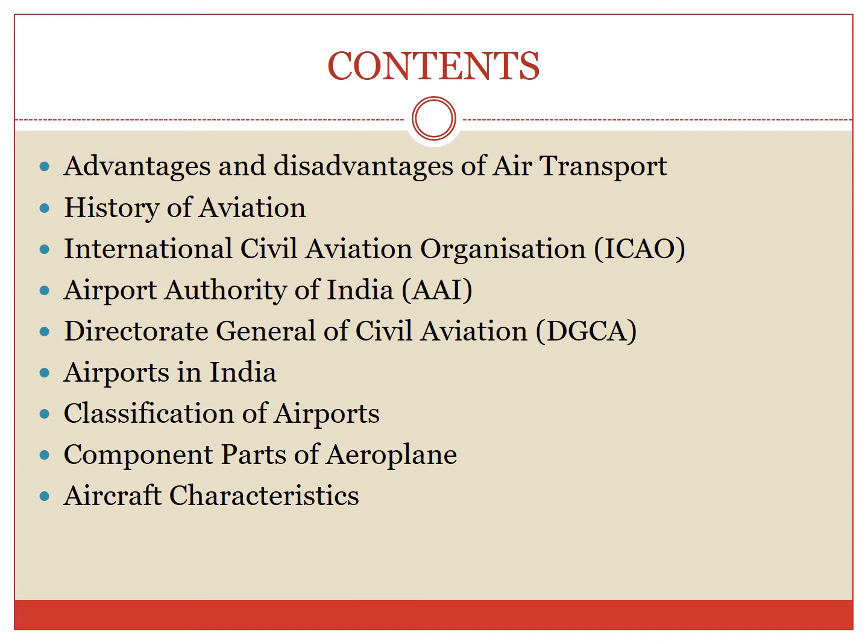Now moving to the advantages and disadvantages of air transportation, let us look into some advantages. As we all know, due to its high speed, it saves energy and time. Air transportation is continuous over land and water without loss of time, unlike road and rail networks. It helps in the economic growth of the country, faster development and distribution of products and services. Air transportation has the unique ability to open up any region that is inaccessible by other means of transportation.

It provides opportunities for foreign tourists for adventure during vacation, boosts tourism, and brings social changes by uniting people closer. It helps in better understanding of inter-regional problems. It helps in providing relief operations in emergencies like tsunamis, earthquakes, floods, etc. Airports generate several jobs and increase the value of land around them.

Now, major disadvantages are: it is very high in expense, including the cost of vehicles and traffic control systems. This mode of transportation has very few passengers and small cargo capacity. Thus, the freight charges are comparatively very high. The weight carrying capacity of an aircraft is lowest amongst the other carriers of transportation.

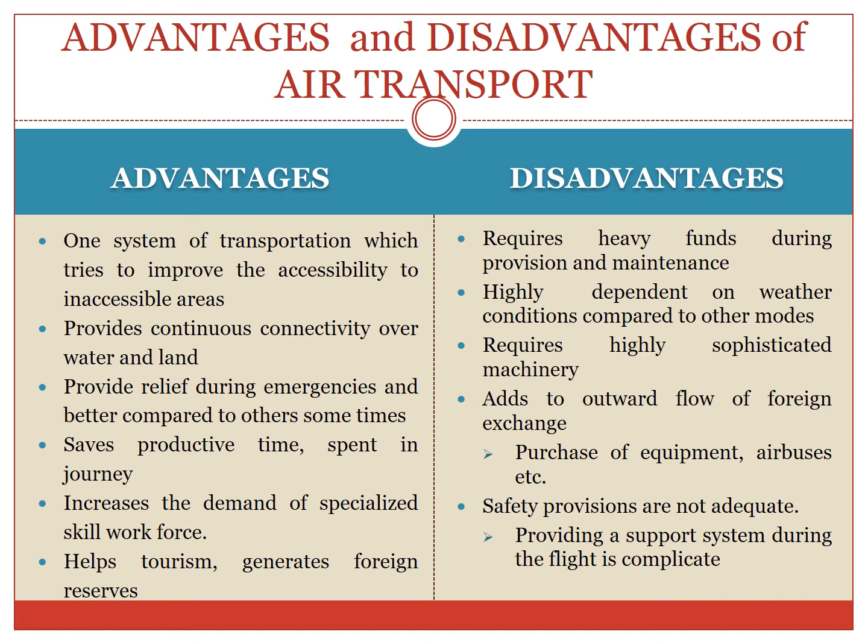Roger Bacon was the first man who studied the flight of birds and made a prophecy in 1266 that the source of energy for flight can be derived from fire. In 1903, the first flight was made by a bicycle repairman named Orville Wright in a power-driven aircraft which was heavier than air. He propelled himself through the air a distance of 35 meters in the USA.

During the period 1914 till 1918, technical development of aircraft and engines in terms of dependability and load carrying capacity accelerated, partly due to World War I. In 1918, the first international air services started between New York and Washington. In 1929, it was in India that regular air flight was started between Karachi and Delhi by Imperial Airways.

In May 1927, the first longest flight of over 4,500 kilometers was undertaken from New York to Paris. In 1939, the first jet flight was flown in air. And in 1952, as we reached the 1950s, full-scale commercial service started using the Boeing 707.

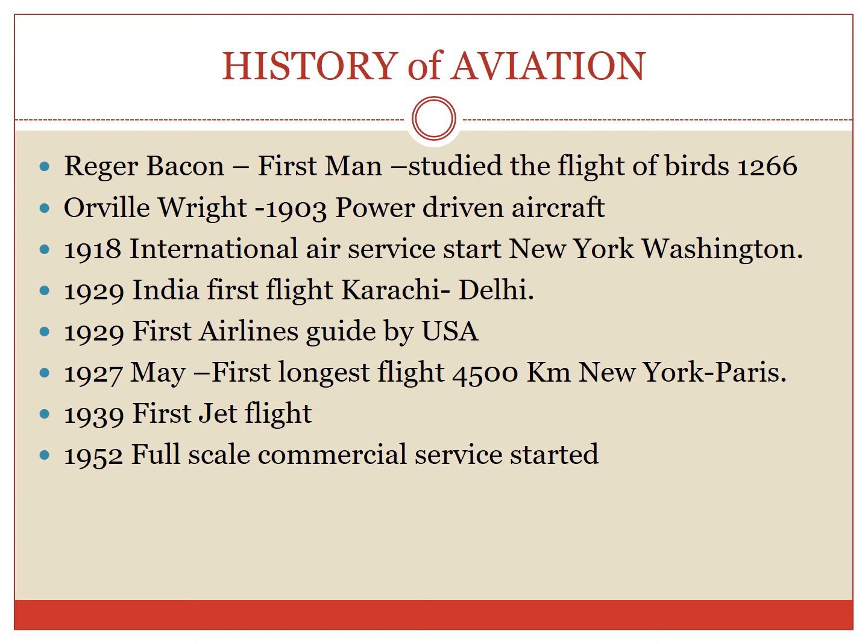Now we come across to the International Civil Aviation Organization. In 1944, delegates from 52 nations met in Chicago, USA to consider the problems of international civil aviation. It was then created on April 4th, 1947, with its headquarters in Montreal, Canada. It is a specialized agency of the UNO, United Nations Organization.

ICAO had some aims and objectives. Some of them are: to ensure safe and orderly growth of international civil aviation throughout the world; to encourage the art of aircraft design and operation for peaceful purposes; to promote the development of airways, airports, and air navigation facilities for international civil aviation; to meet the needs of the people of the world for safe, efficient, and economical air transport; to prevent economic waste caused by unreasonable competition; to avoid discrimination between contracting nations; to promote safety of flight in international air navigation; and to promote generally the development of all aspects of international civil aviation.

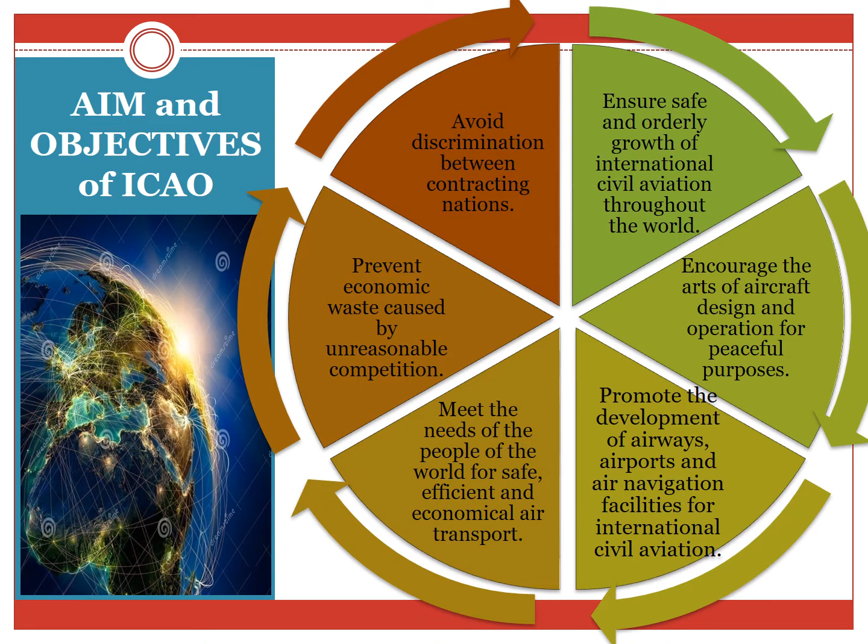Now moving across to the Airport Authority of India. The Airport Authority of India was constituted by an Act of Parliament and came into being on 1st April 1995 by merging the National Airport Authority (NAA) and the International Airport Authority of India (IAAI), forming AAI, the Airport Authority of India. The merger brought into existence a single organization entrusted with the responsibility of creating, upgrading, and managing civil aviation infrastructure, both on the ground and in airspace in the country.

Some of the major functions of AAI are: design, development, operation, and maintenance of international and domestic airports and civil enclaves. It controls and manages Indian airspace extending beyond the territorial limits of the country as accepted by ICAO. It also handles construction, modification and management of passenger terminals, and the development and management of cargo terminals at international and domestic airports.

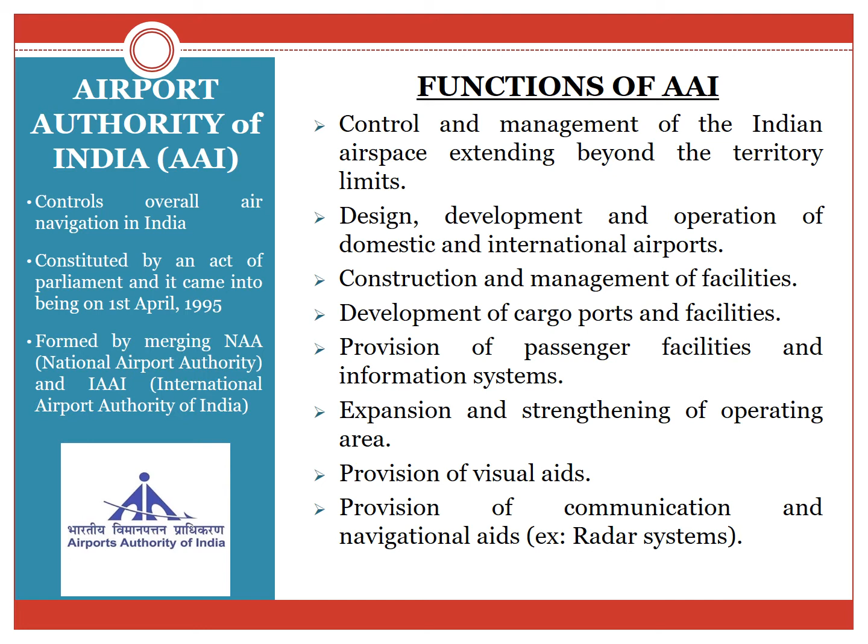It helps in expansion and strengthening of operational areas such as runways, aprons, taxiways, and many other things. The provision of visual aids has also been looked after by the AAI.

Now moving to DGCA, the Directorate General of Civil Aviation. It is a regulatory body in the field of civil aviation, established in 1945. Its functions include regulation of air traffic services, licensing of pilots, registration of aircrafts, licensing of aerodromes, approval of tariffs/schedules, monitoring flight crew standards, and supervision and training of pilots.

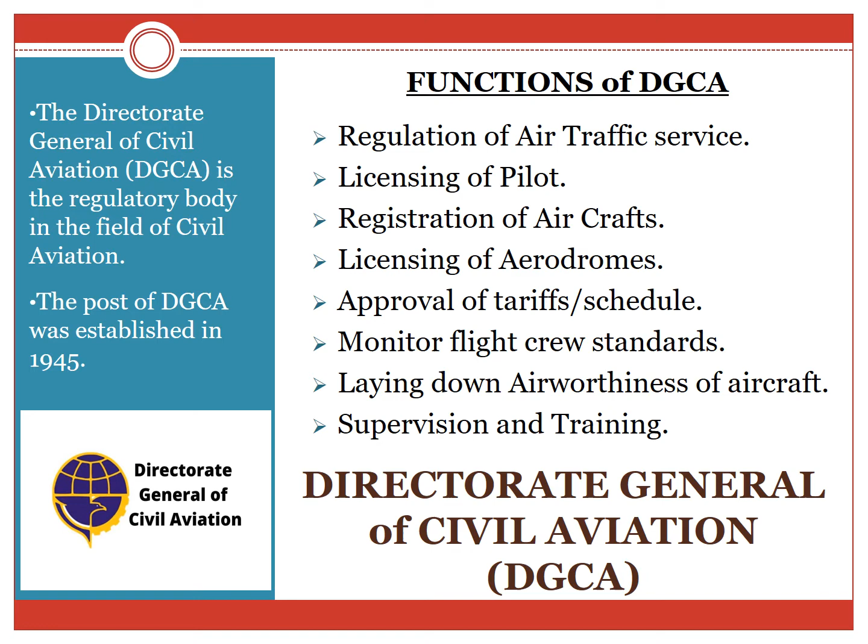There are 131 total operational airports, that is 106 with scheduled commercial flights, including some with dual civilian and army use.

Before moving to the classification of airports, there are two terms which have different meanings but are often misunderstood: aerodrome and airport. What is an aerodrome? A defined area on land or water intended to be used either wholly or in part for the arrival, departure, and surface movement of an aircraft. This is known as an aerodrome.

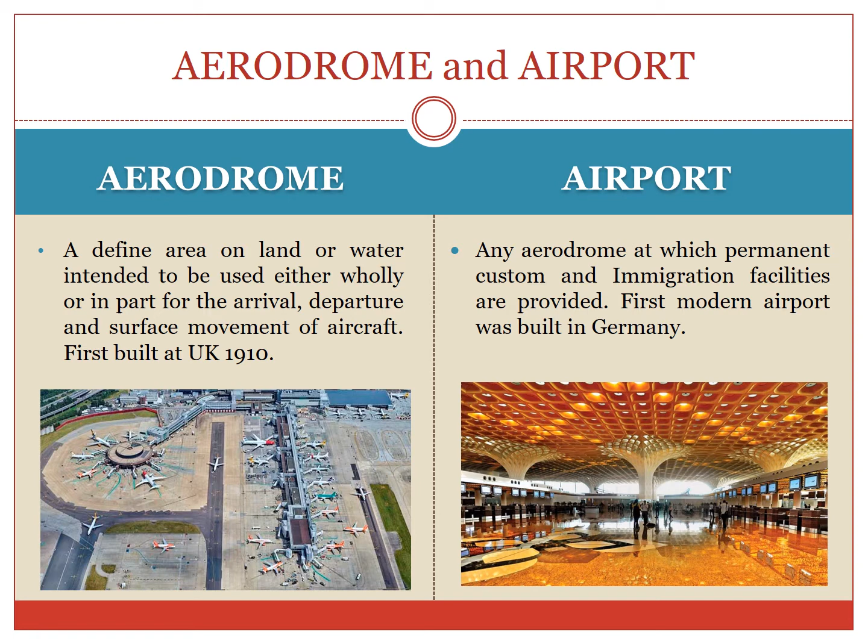And what is an airport? Any aerodrome at which permanent customs and immigration facilities are provided is known as an airport. The first aerodrome was built in the UK in 1910, and the first modern airport was built in Germany just before the Second World War.

Now moving to the classification of airports. Based on function, airports are classified into three categories: heliports, STOL ports, and conventional ports. Heliports are meant for helicopters, STOL ports for short takeoff and landing, and conventional ports for normal commercial aircraft.

Based on usage or ownership, airports are divided into four categories: public, private, military, and joint use. Public airports are owned by the government, private ones by individuals, military airports are used for military purposes only, and joint use airports are used by both civil and military aviation.

Airports are also classified based on the facilities available, the number and type of runway, and based on navigational aids. Lastly, based on the type of aircraft, there are four categories: BU, basic utility airports; GU, general utility airports; BT, basic transport airports; and GT, general transport airports.

What is a BU airport? These accommodate single engine and light twin engine aircrafts. GU accommodates medium twin engine aircrafts under 5,670 kilograms. Basic transport airports handle business jets under 27,200 kilograms. And general transport airports accommodate anything that flies.

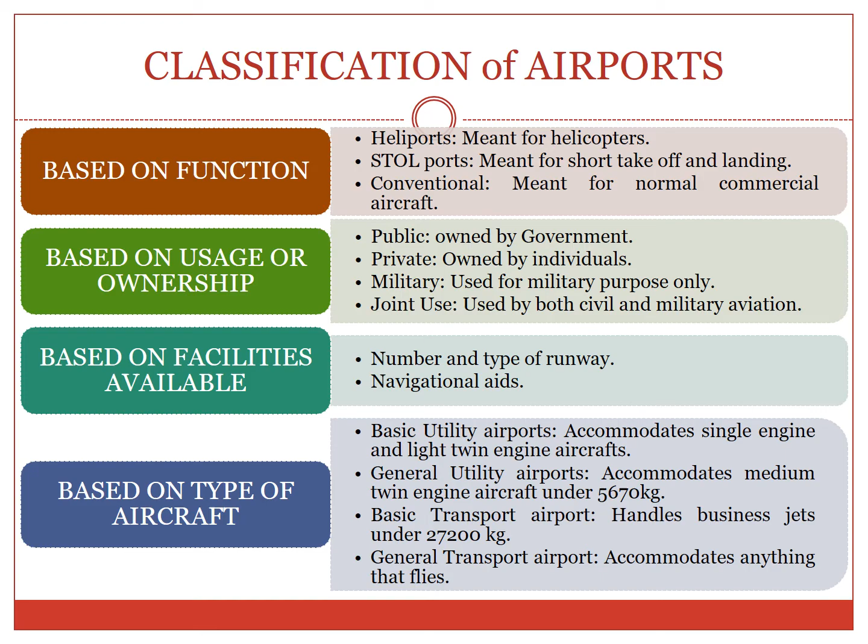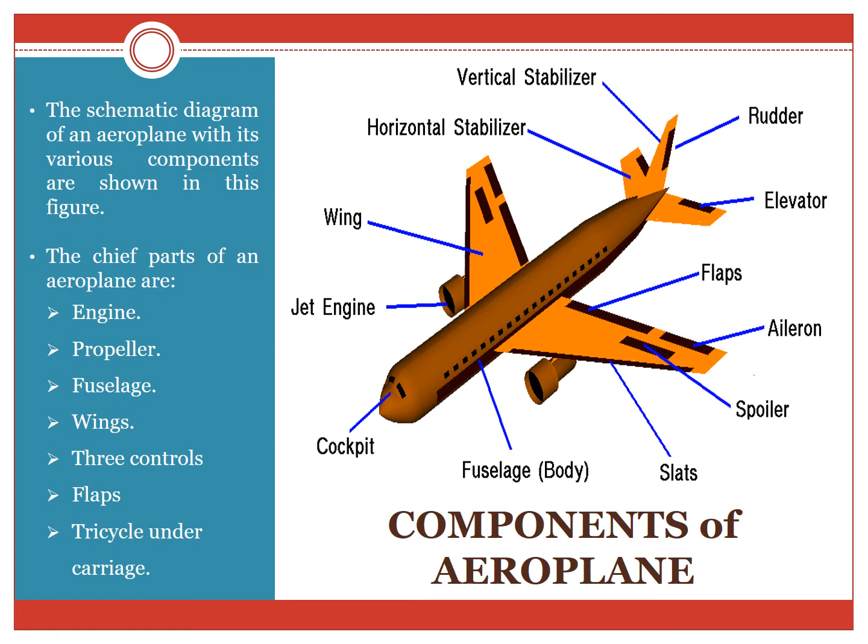In this figure you can also see other parts such as the cockpit, horizontal stabilizer, vertical stabilizer, rudder, elevator, ailerons, and spoiler. These are the major components of an aeroplane.

Moving to the engine, its main purpose is to provide the force for propelling the aircraft through the air. There are four classifications according to propulsion: piston engine, turbojet, turboprop, and rocket engine.

What is a piston engine? These are the conventional type of aircraft engines, suitable for operating at low altitudes with medium speeds. In this system, the engine rotates the shaft with considerable torque, and the propeller is mounted on the shaft to absorb that torque. When the rotating propeller attains its rated speed, it pulls huge masses of air rearward, thereby pulling the aircraft forward and creating lift on the wings.

Turbojet: in this type, to start the machine, a compressor is rotated with a motor.

As the compressor gains speed, it sucks in air through the air intake and compresses it in the combustion chamber. The air is ignited by fuel or kerosene oil. The expanding gases pass through the fan-like blades of the turbine. The compressor rotates at the same speed as the turbine because the two are fastened solidly with one shaft. These hot gases with remaining energy escape through the tailpipe, which becomes smaller in diameter at the exit end. These hot gases, having high velocity, give a forward thrust to the engine.

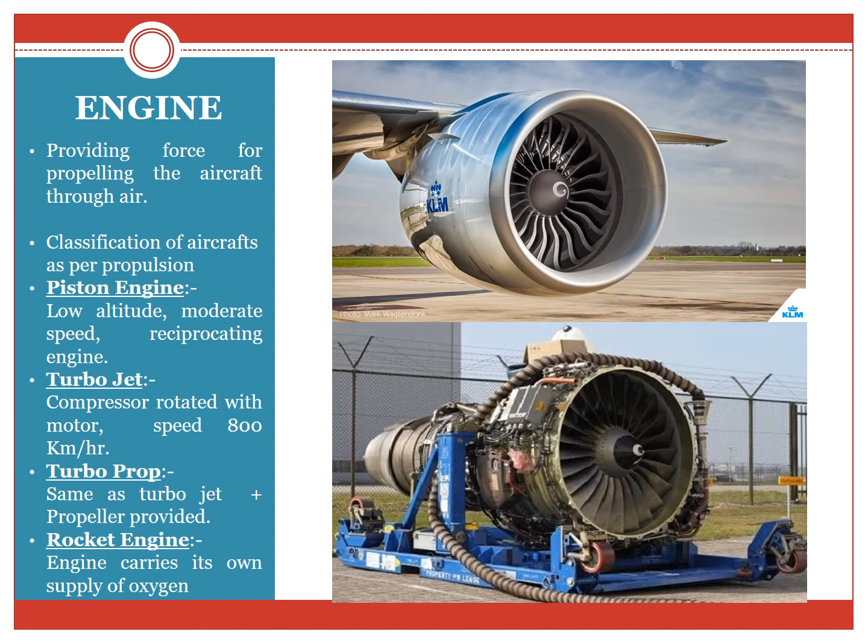Last is the rocket engine. All the engines described require oxygen to support combustion, so they can fly only up to a certain altitude where sufficient oxygen is available. But the rocket engine has no limit to altitude, since oxygen in the atmosphere is not relied upon for combustion. The engine carries its own supply of oxygen.

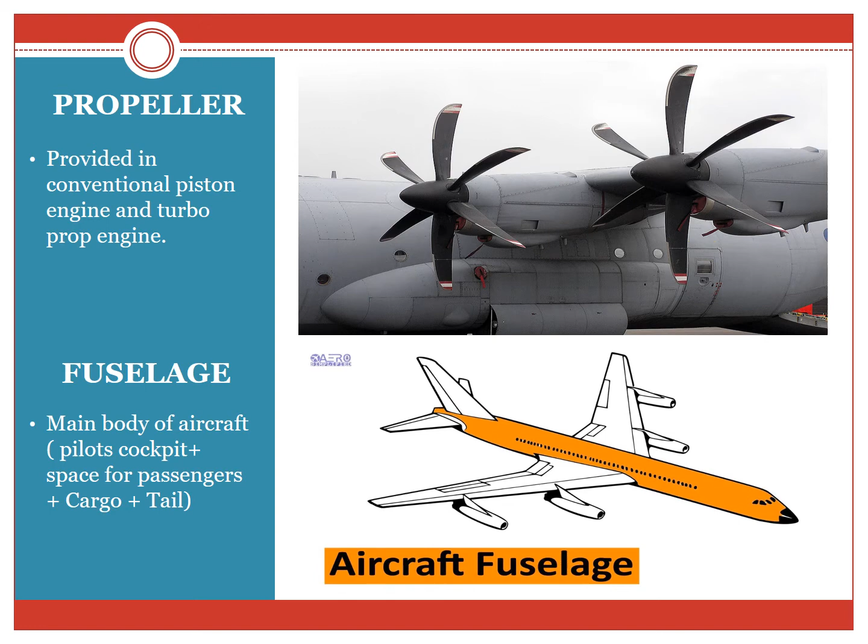Next we come across to the wings. The aeroplane may have a simple pair, double pair, triple, or quadruple pair of wings. The standard plane is the monoplane, having one wing on either side of the fuselage. The purpose of an aircraft wing is to support the machine in the air, when the engine has given it the necessary forward speed.

The term aerofoil is used to mean a wing-like structure which may be flat or curved, designed to obtain reactions upon its surface from the air through which it moves. The wing is slightly curved in section and set at a small angle of incidence to the horizontal.

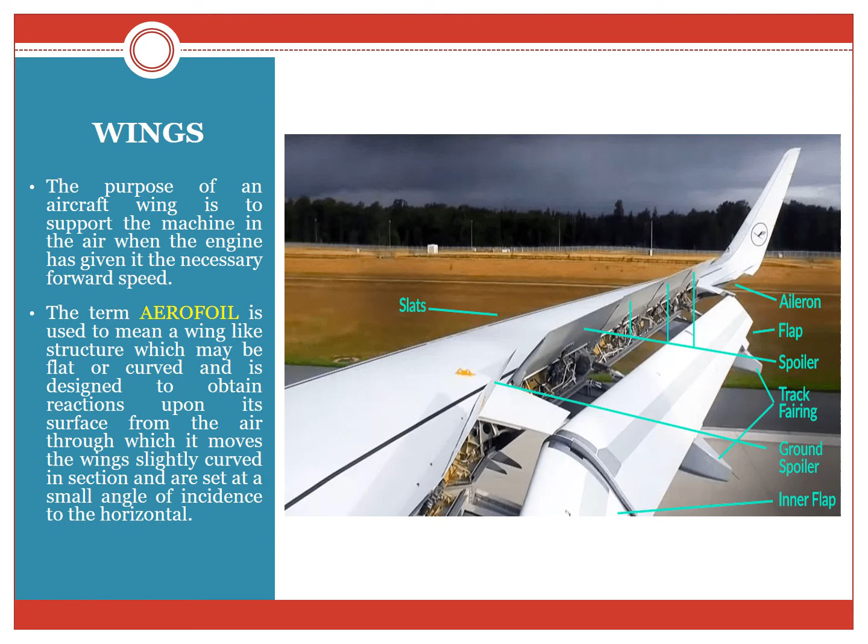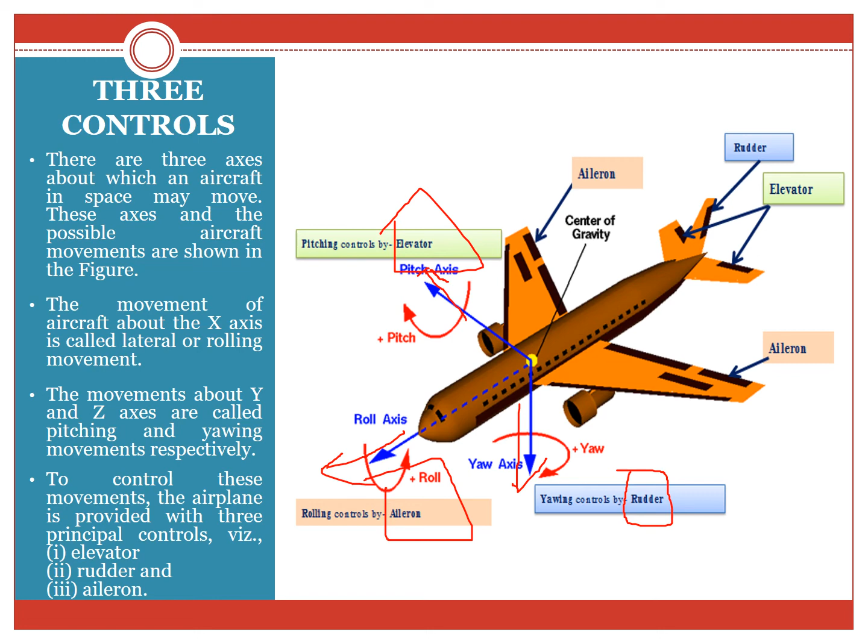The movement about the x axis is known as the rolling movement. The movements about the y and z axes are known as pitching and yawing respectively. To control these movements, the airplane is provided with three principal controls: the elevator, the aileron, and the rudder. These then control the three principal axes known as the yaw axis, the roll axis, and the pitch axis.

Now, what are elevators? Elevators are used to control the pitching, up-and-down movement. It controls during takeoff and maneuvers, and helps in losing speed and turning.

The rudder controls the yawing. It controls the flaps that are used for going sideways. Provided at the tail, it can move around 30 degrees.

Ailerons. Now what are ailerons? These are provided for rolling motion. Hinged flaps: as one wing rises, the aileron on the other wing goes down. This enables the pilot to restore level flight when it is tilted by a gust of wind. It stabilizes the plane.

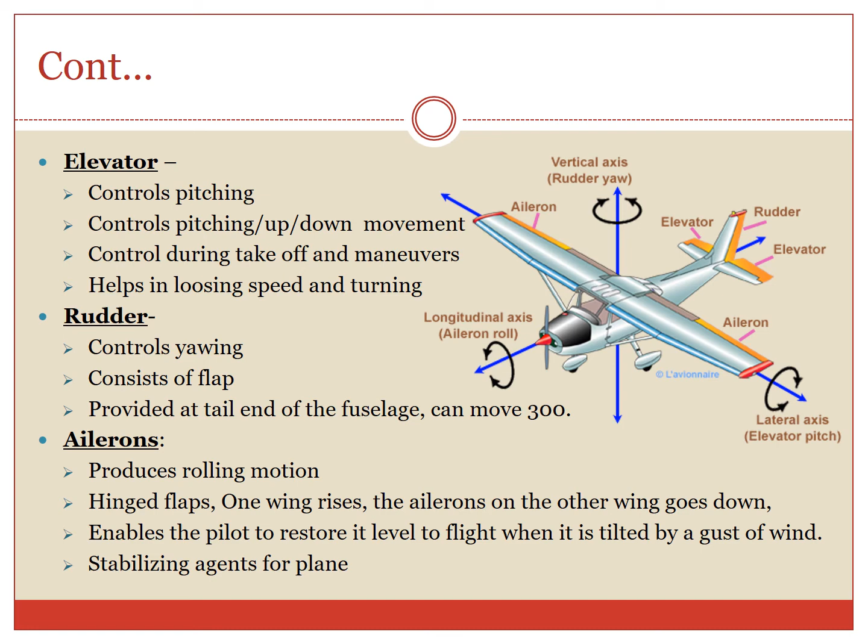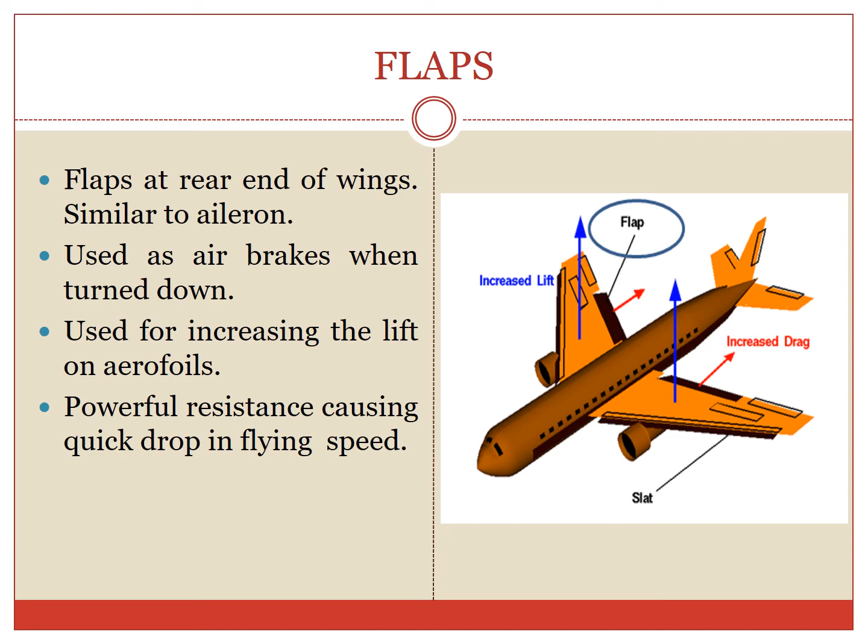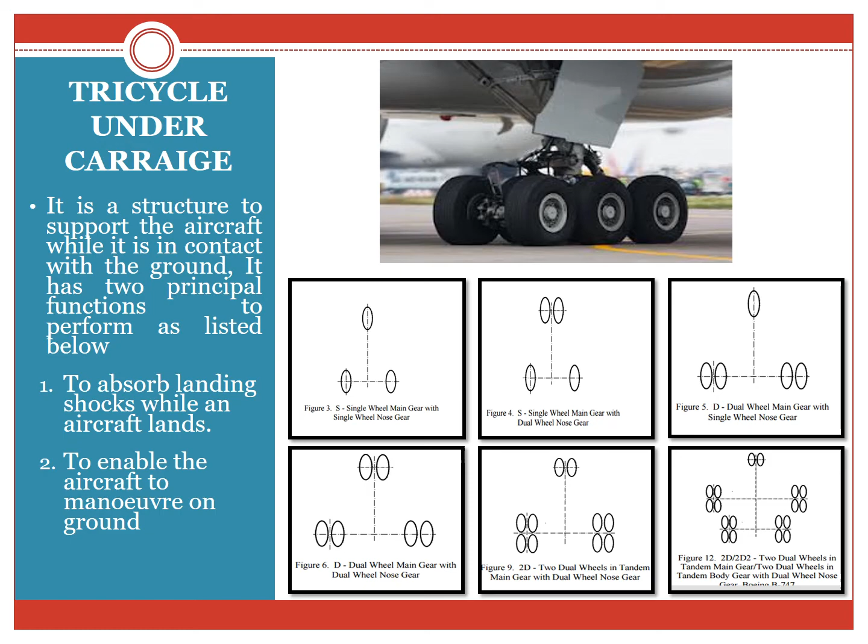Now moving across to the last topic, that is aircraft characteristics. Aircraft characteristics are of prime importance to the airport planner and designer because they must know the following principal aircraft characteristics: type of propulsion, size of the aircraft, weight of the aircraft, wheel arrangement, capacity of the aircraft, the speed of the aircraft, minimum turning and circling radiuses, fuel spillage, jet blast, and noise.

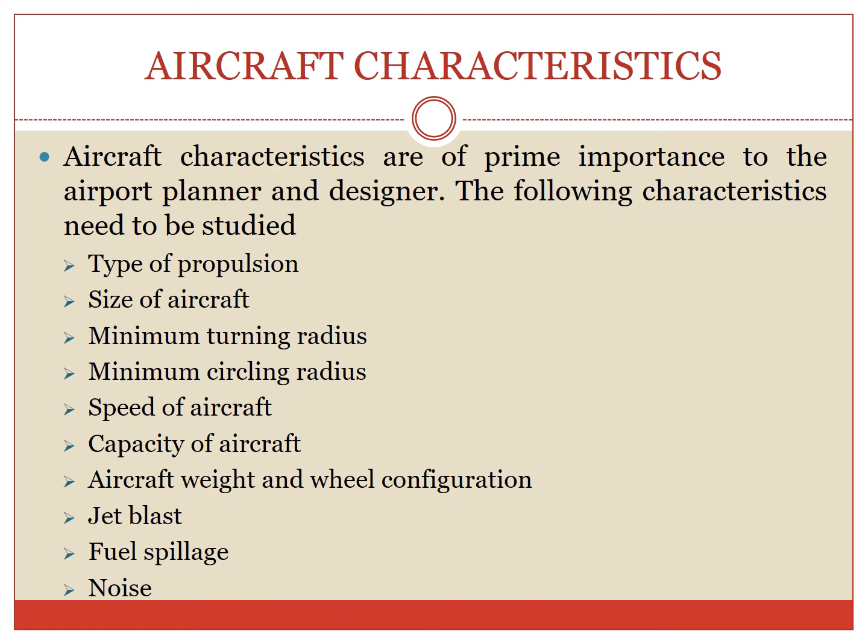Type of propulsion. Based on the type of propulsion, aircrafts are classified under piston engine, turbojet, turboprop, and rocket engine. Piston engine requires low altitude and moderate speed of around 500 kilometers per hour. Turbojet, a balloon at a speed of 500 kilometers per hour. Turboprop, propeller is provided, high altitude speed at 1280 to 2400 kilometers per hour. Rocket has no limit of altitude and the speed will be around 4600 kilometers per hour.

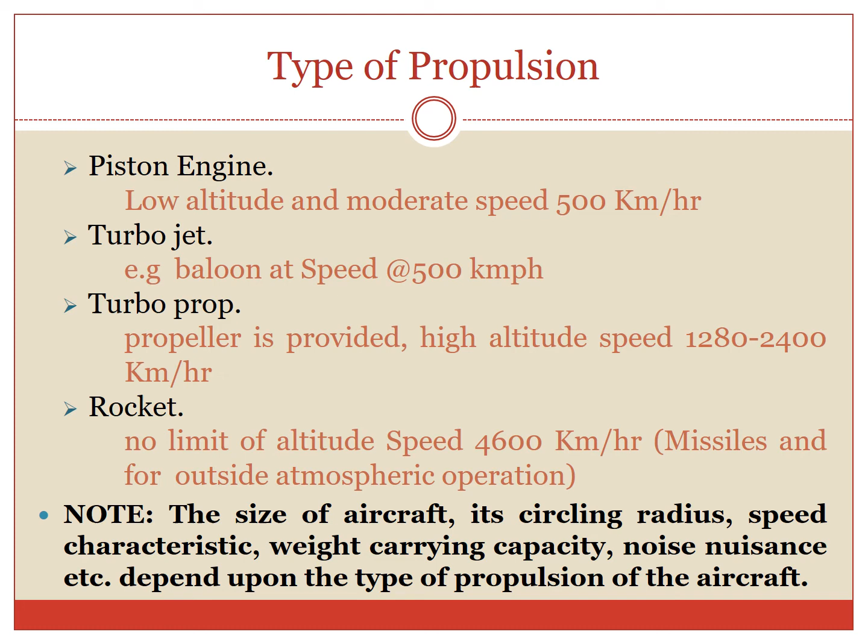Note that the size of the aircraft, its circling radius, speed characteristics, weight carrying capacity, and noise nuisance all depend upon the type of propulsion of the aircraft.

The wingspan decides the size of the taxiway, apron, and hangar. Second is the height, which decides the size of the hangar. The third is the fuselage length. It decides the width of the taxiway and the hangar.

The fourth is the distance between the main gears and the gear tread, which decides the turning radius. Number 5 is the wheelbase, which decides the turning radius. And lastly, the tail width.

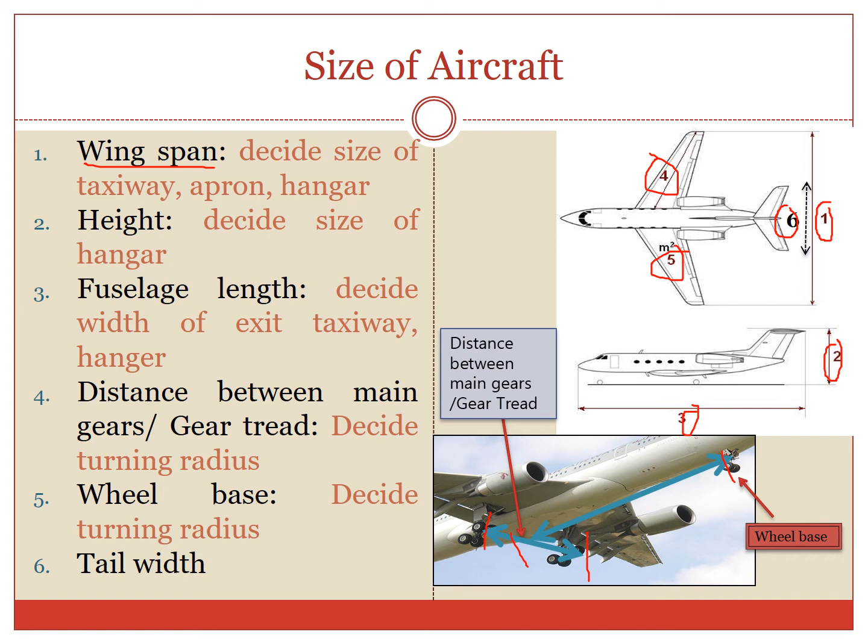Now moving across to the turning radius. It is the distance of the farther wing tip from the center of rotation, used to decide the radius of the taxiway and position of the aircraft in the loading apron and hangar. The figure shows the minimum turning radius of an aircraft.

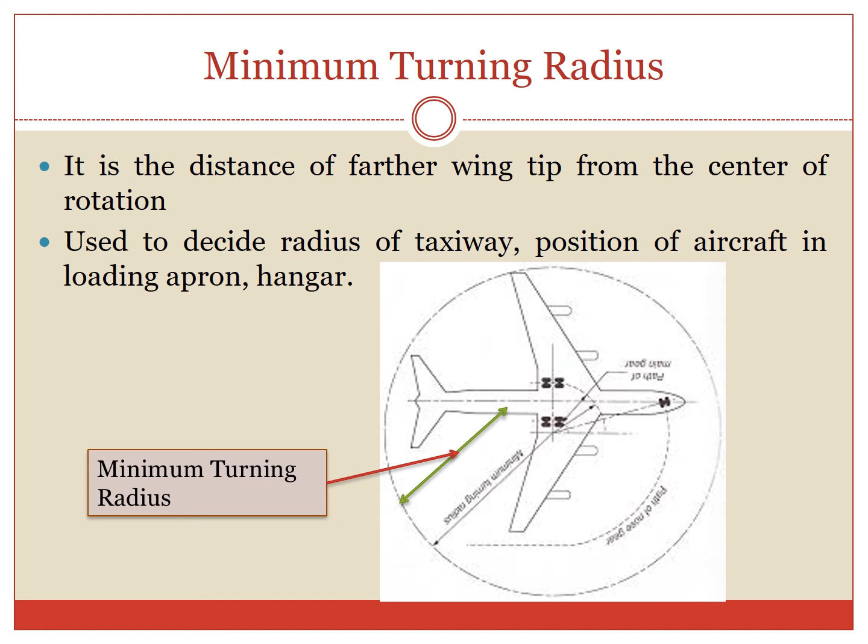Next is the minimum circling radius. There is a certain minimum radius with which the aircraft can take a turn in a space. This depends upon the type of aircraft and weather conditions. It is used to design the distance between two airports.

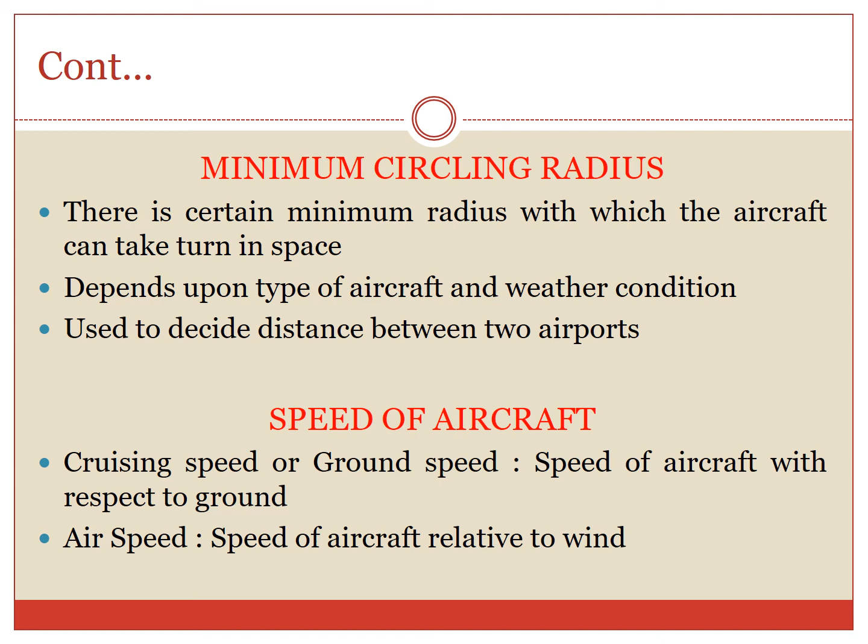Speed of an aircraft: cruising speed or ground speed decides the speed of the aircraft with respect to the ground. And lastly, the airspeed decides the speed of an aircraft relative to wind.

Next is the aircraft capacity. The number of passengers, baggage, cargo, and fuel that can be accommodated in an aircraft depends upon the capacity of the aircraft.

Next is the jet blast. The aircraft ejects hot exhaust gases. The velocity of the jet blast may be as high as 300 km per hour initially, causing inconvenience to passengers. Bituminous pavement may also be affected by jet blast.

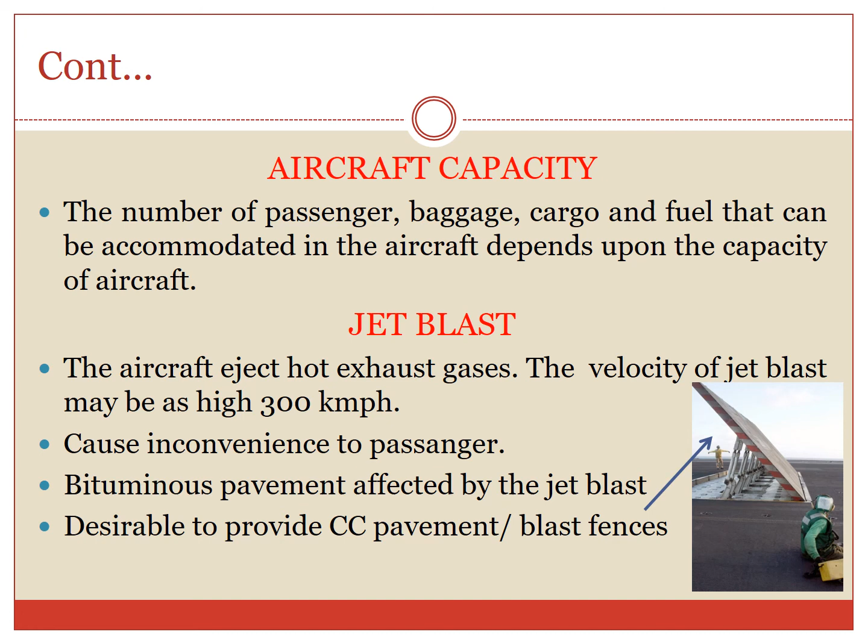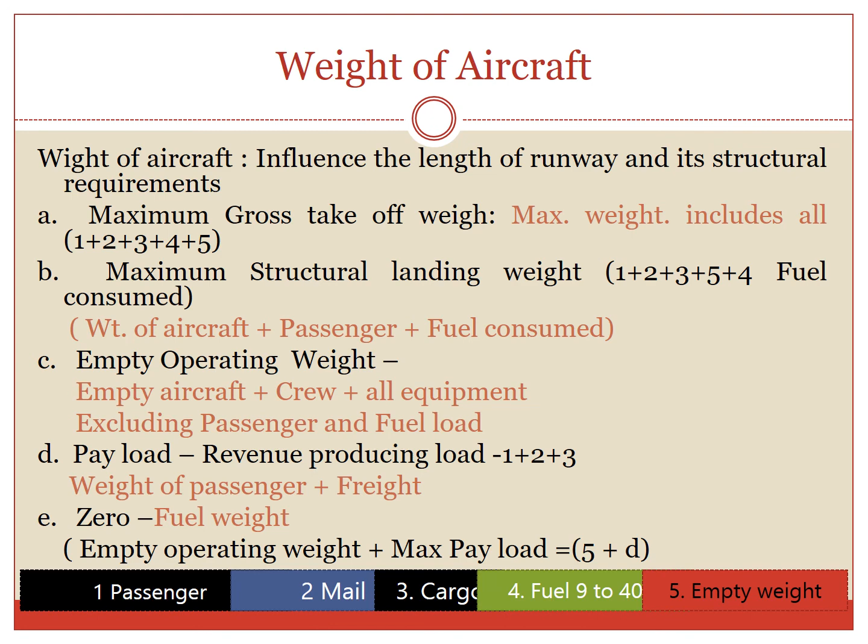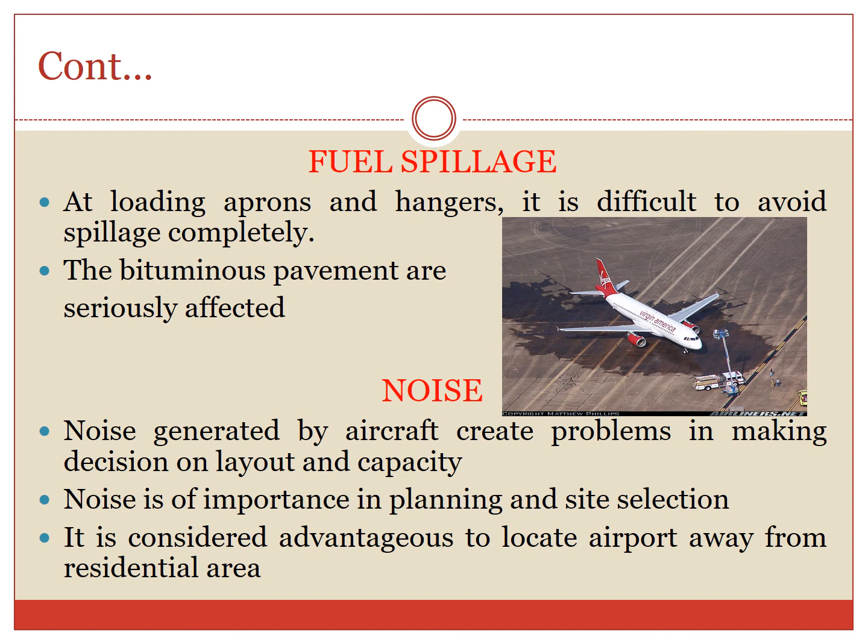Noise. The noise generated by an aircraft creates problems in making decisions on layout and capacity. This noise is of importance in planning and site selection. It is considered advantageous to locate the airport away from residential areas.